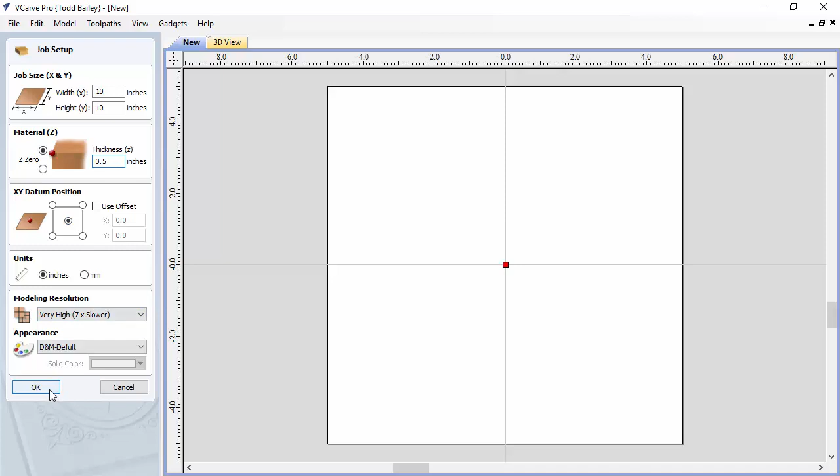We'll move over to our clip art tab and go to our Design and Make folder. I'm making the assumption you've already purchased, downloaded and installed the Wine Bar No.2 project, so you've got all 11 individual models available along with the assembled layout, which we won't be using here, but it's good to note that the assembled layout is an actual wine bottle coaster sized appropriately for a standard size wine bottle.

The recess in it is actually 4 inches across when you bring it into your software, as long as you don't modify the dimensions any. That's about the right size to accept a 3 to 3 1/4 inch wine bottle. There's a little extra wiggle room so that when you're putting your wine bottle down, you don't hit the ridge and end up having it topple over.

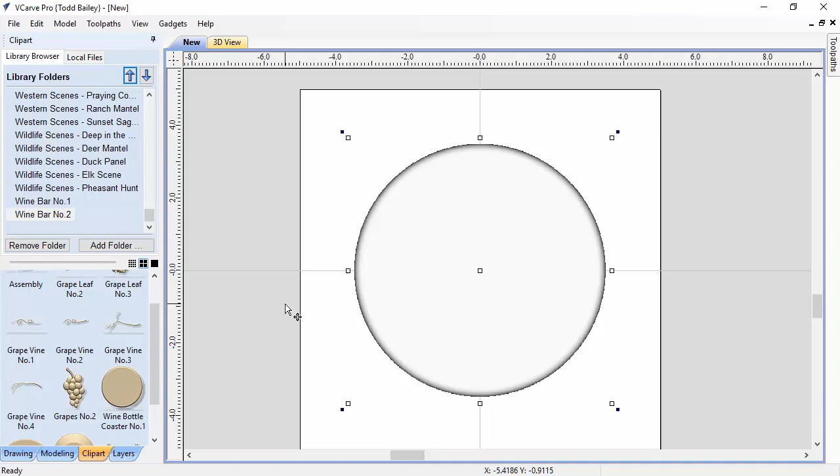So for this demonstration we're going to use wine bottle coaster #1. We'll double click on that, and that will bring the model into our job space. Now we'll flip over to our 3D view for a second and take a look at this. This is a very flat model.

If you chose to create this first layout, there are much more efficient ways of machining it than using a 3D toolpath. But we need to show you this to make sure you understand how to use this same model to create the recess for the wine bottle.

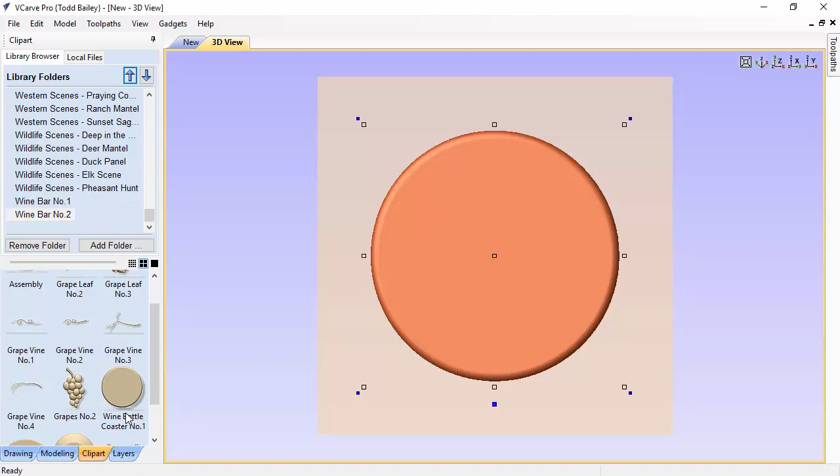Once we get through that, we can add to that or build upon those tools. So we're going to look straight down at it again and go to our modeling tab, making sure this is the proper size for what we need.

We'll click on the drawing tab and size this object up to the appropriate dimension we want. We're going to make this 7 inches across and hit apply. So now it's 7 inches round.

We had Link X and Y clicked on, and Auto Z Scale is on as well. Those are pretty much standard settings, but in case you happen to shut those off, make sure they're turned on so your width and height are the same.

Now we need to make sure the shape height is appropriate for the thickness we need in order to accept the recess we're going to put in there. So we'll go to our modeling tab and use the wrench here, the properties dialog, and make sure this is set to 0.35 of an inch. The shape height of that particular model is 0.35 of an inch.

That'll make sure it's thick enough so that when we put our recess in there, that's fine.

Now we accessed these component properties from the modeling tab, but in the future what we're going to use is this little button right here at the bottom. Once you have an object or component selected and you see the control handles show up, there'll be a blue button at the bottom you can click to bring up your floating properties dialog. It has a lot of the same options as your component properties, but they're condensed into this nice convenient little floaty deal that works really well.

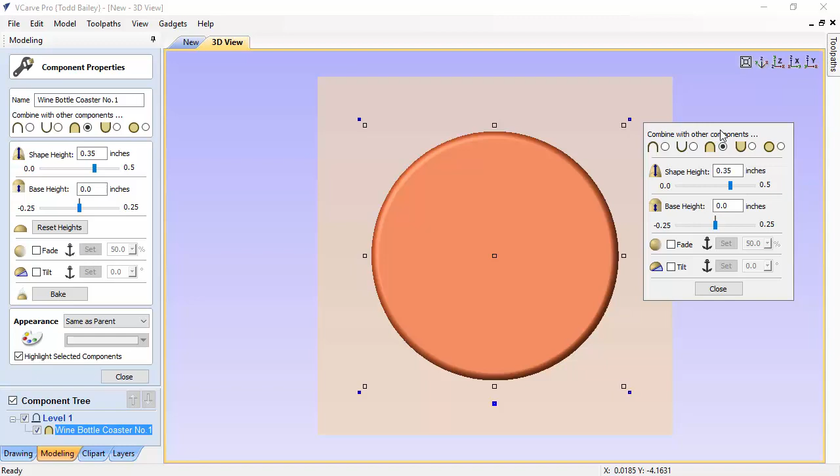So we're going to close that down, and we'll close this down. Now we're going to bring in our model to create the recess for the bottle, and again, like I mentioned before, we're going to reuse the wine bottle coaster again.

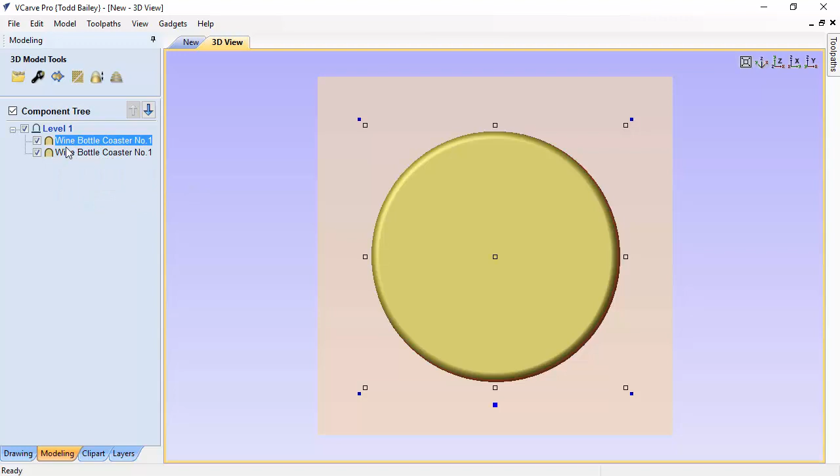Now when you bring it in, you can't see it because it's actually being merged inside the one we had there previously. So if we go to our modeling tab, you'll see there's actually 2 models in here, and the one that's selected is the second one we brought in. It always builds up from the bottom up.

So this is the first wine bottle coaster we brought in and sized, and this is the second one we brought in. So we're going to rename this just so we don't get confused in the future. We're going to right click on that, go down to rename, and we're going to call this recess. And there we are.

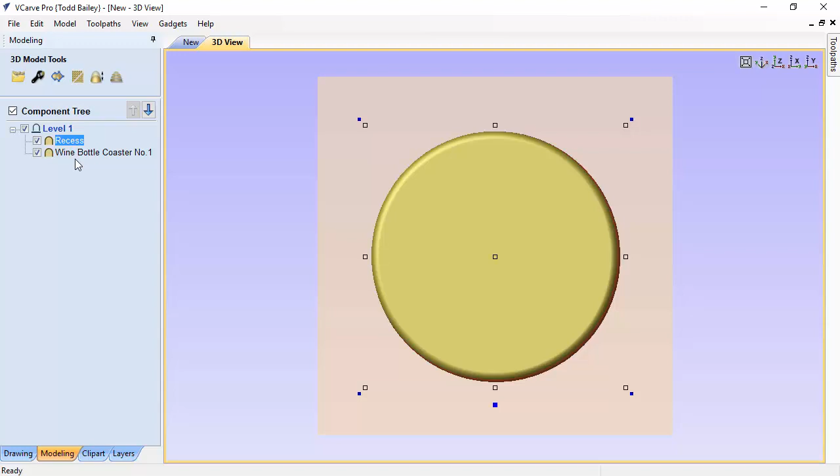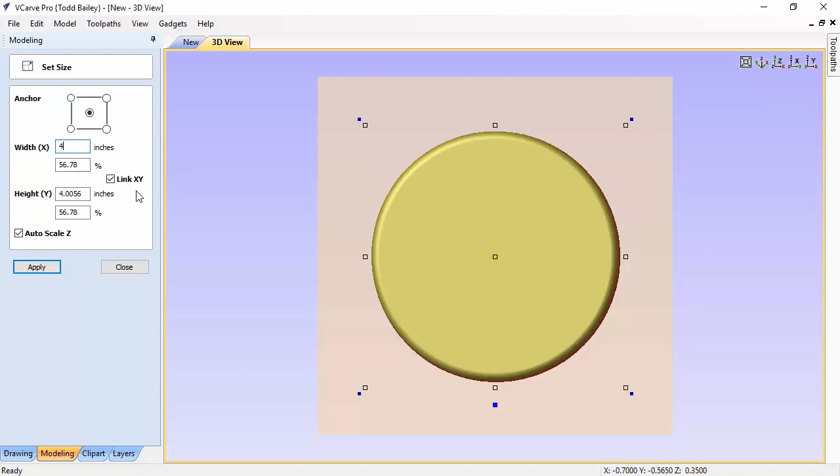So now we'll know there's an obvious difference between the two namings here in case we get confused. We're going to select that one, and instead of going to the drawing tab and clicking set selected object size, we're just going to press T on the keyboard. That brings up our set size dialog, and we're going to set this to be 4 inches, making sure we have link X and Y together and auto Z scale on, and we'll click apply, and that'll make our recess.

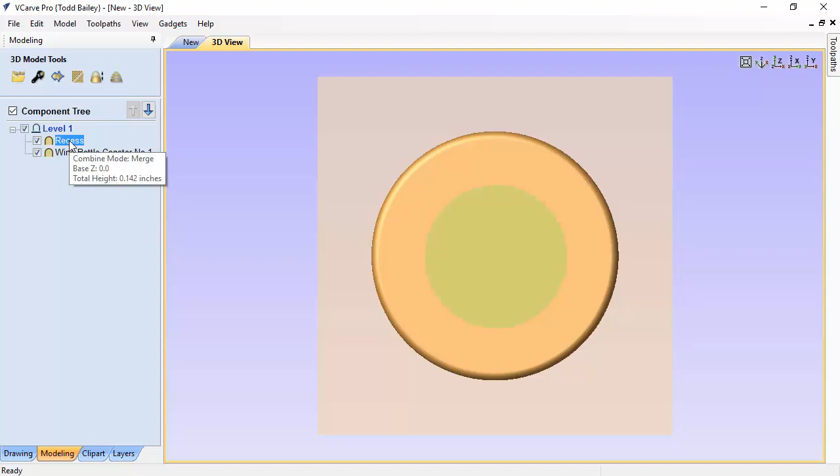Now you'll notice our recess is still being merged into our larger wine bottle coaster, and that's not going to work, because we want it to actually be subtracted away from our original model. So we're going to right click on this, combine mode, and subtract, and now we'll see we actually have a recess in our coaster.

That's not nearly deep enough for what we need, so let's go ahead and correct that. We're going to select that, click on the floating properties dialog, and make this 1/4 inch. That means our recess will be 1/4 inch deep, and the difference between the shape height of our large coaster and the recess is actually 0.1, which gives us a little bit of extra material at the base of this.

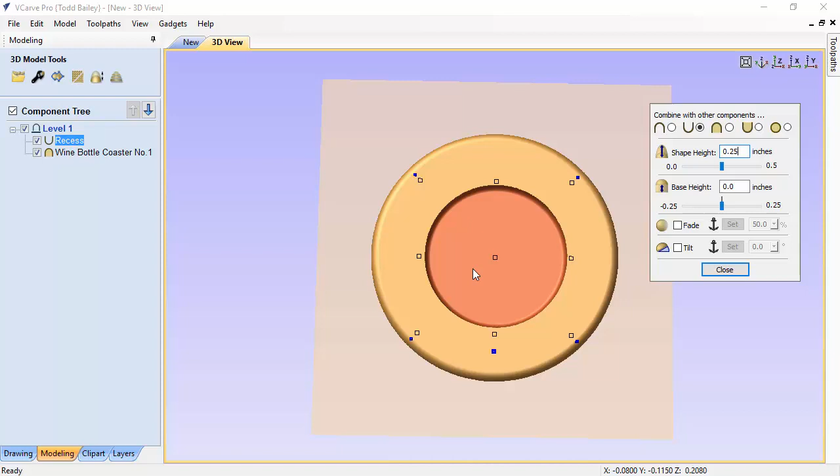Now that's good for right now, but in the future we're actually going to increase that by leaving a bit of material at the back of our project so we can thicken it up a little, because that's not quite enough, I don't think, to hold our bottle.

We're going to close that down now, and make sure this is centered in our job space. So we're going to press F9 just to make sure it's centered, and you'll see it was off center slightly, so we're going to center that up.

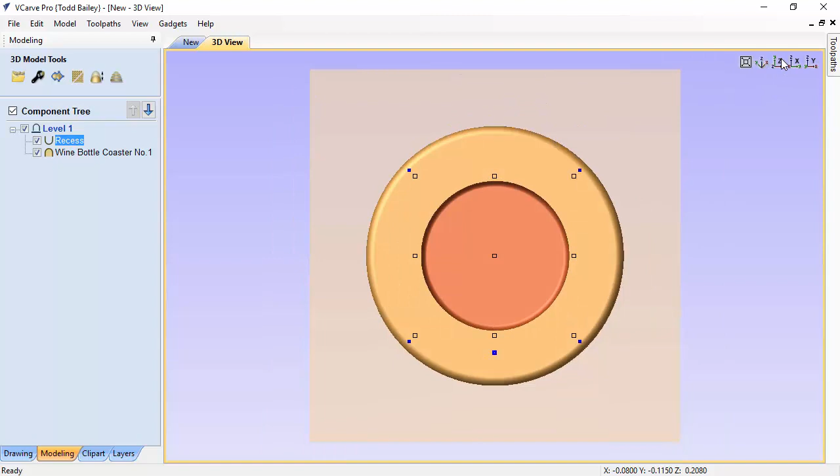Now we're going to look straight down on our project, and holding down our shift key, we're going to drag this up to here, because we want some space down here to add some V-carving, some flat area. So let's go back to our drawing tab, go to our 2D view, and press F on the keyboard to fit this to our screen, and we're going to create some text.

And we're going to create the text. Let's think this is maybe for a wedding, so we're going to put in Jennifer and Edward.

And we're going to make their wedding date September the 12th, 2016, and let's hope that that is a weekend, because I'm not quite sure - that's just a guess. We're going to make sure that's centered, use the Pristina font, and click apply. We're going to close that down, and now move that down to the bottom here. Perfect.

So that looks pretty nice. Now that's our very basic layout, and why I went through that was just to show you that we needed to use that wine bottle coaster model twice in order to give you the recess.

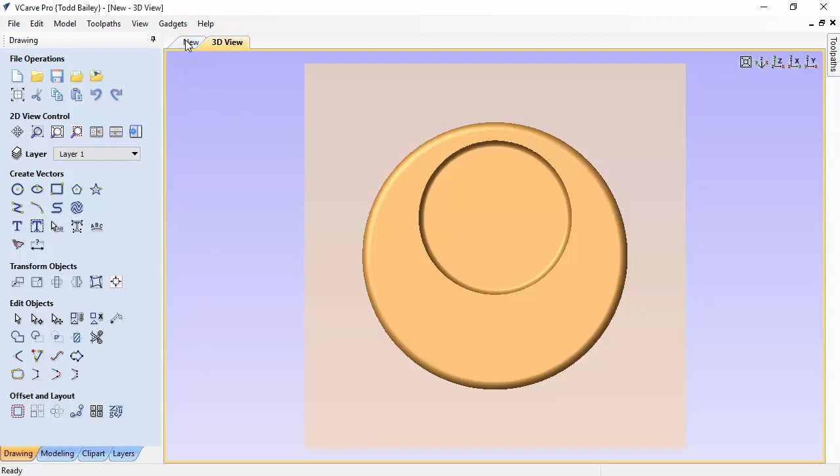From here on out, we'll be using that wine bottle coaster to create the recess for all of the projects. And if you decide in the future to create a candle holder out of this project, much like we show on the website here - if you scroll down, you'll see there's a candle holder here. The center socket is actually the coaster, just subtracted, and the shape height is exaggerated so that you can actually create a socket. We have all the instructions on the website here to create the proper size socket for a candle, depending on whether you're making a pillar candle holder or a tapered candle holder. So all of it's there for you in case you want to do that.

So let's go back to VCarve. Now let's update this with a little bit more, make it a little more interesting, because like I said, right now this is very basic. To machine this with 3D toolpaths probably wouldn't be very efficient.

You can do it much quicker by just using a round over bit, do a quick little profile cut, pocket out a hole that's the right diameter, do a little V-carving, and then you would be done. So this really isn't a very efficient way of doing this. But if we add some grapes and some grape leaves to this, then of course you can't use that super fast machining, so you're going to have to do something a little different.

So what we're going to do now is go ahead and adjust our text, and make sure our text goes inside of the recess. That'll be kind of neat, because when the coaster isn't in use, it's a nice little keepsake for their wedding date. So let's just edit that text.

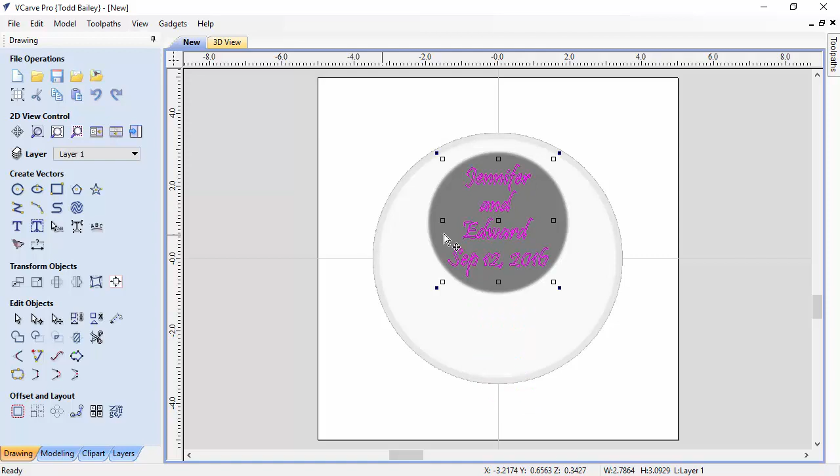Now there's a lot of space in between these lines of text, so let's just go ahead and tighten that up a little bit. We're going to use edit text spacing and curve. If we hover in between the lines of text, you'll see that my pointer turns to a line indicator, so we can adjust the spacing between that.

If I click it without holding down the shift key, it subtracts space. If I hold down the shift key and do it, it adds space. So we're going to let go of the shift key, and just snuggle those in there a bit better.

Be careful, because sometimes when it sneaks in, you end up hovering over top of your letters, and if you click on an actual word, you lose some space between your letters, and that might not be so great. So maybe zooming in might be a good option for you. We're going to take out some more space there, and here, and a little more here. Oops, I did what I said not to do.

Then we're going to go back to our pick tool. I'm going to select that, and we're going to nudge it in. We're just going to eyeball that into the center, and I think that looks pretty nice the way it is.

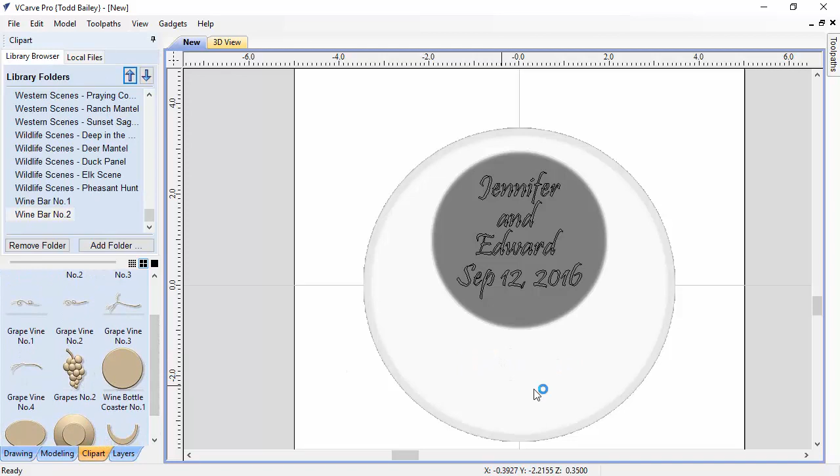So now, to accommodate some more models, we have a couple different options. One is we could easily just go to our clip art tab and add some grapes onto the surface of this if we wanted to. Just go ahead and size that down, and we're going to put that here maybe.

We turn it slightly and pop that in like that. And there we could just basically add some grapes. You're going to have to change the combine mode, so go to modeling, right click on that, combine mode, and add.

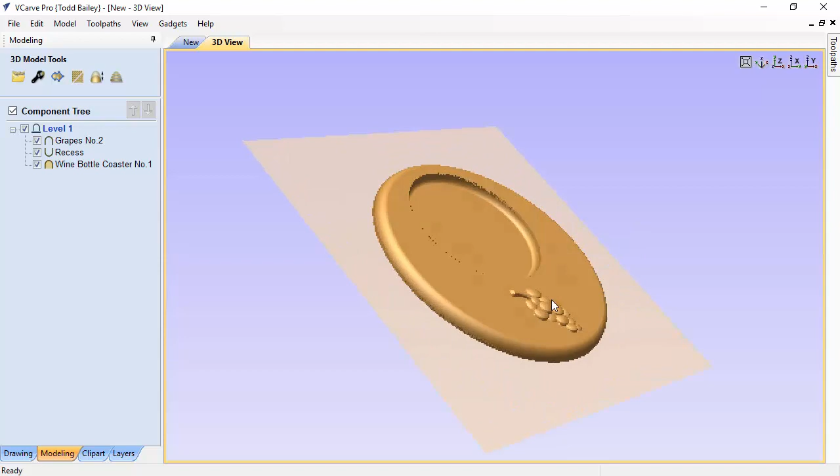Now we've added some grapes to the surface of our wine bottle coaster. We could build on that, but that's not going to give us the best use of our material thickness. We included this little guy, called wine coaster recess number 1. When it's subtracted away from a surface, it will create a recess that you can bring models into and tuck in, giving you more shape height and definition from your projects. It'll also make it look like the leaves are actually coming out of the coaster onto the surface, which is a neat effect.

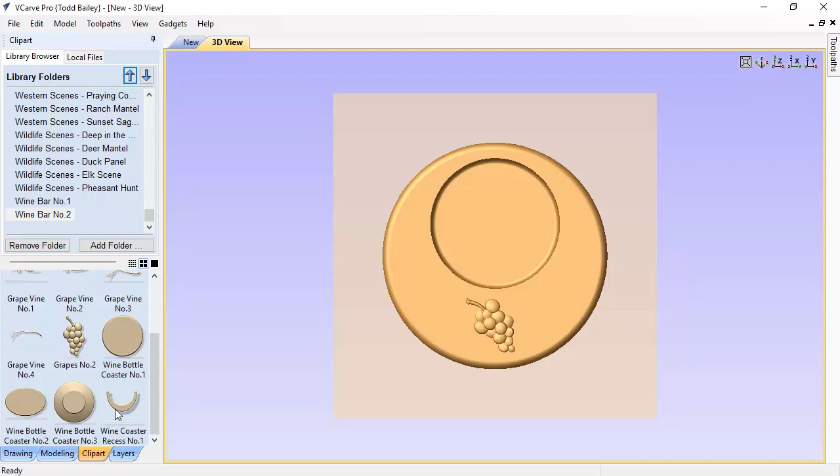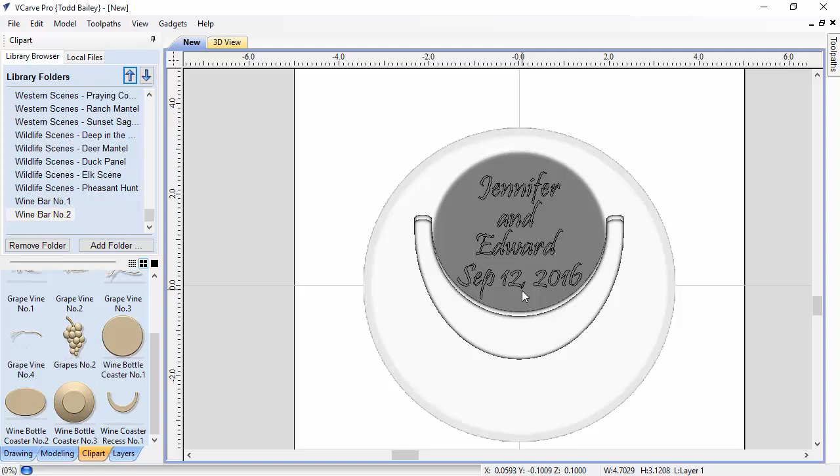So we're going to delete out the grapes by selecting it and pressing delete on the keyboard. Let's bring in our wine coaster recess. That's going to be way bigger than what we need, so let's go to our 2D view so we can see a little bit better. Now the way we're going to do this is we're going to size this down so it fits nicely.

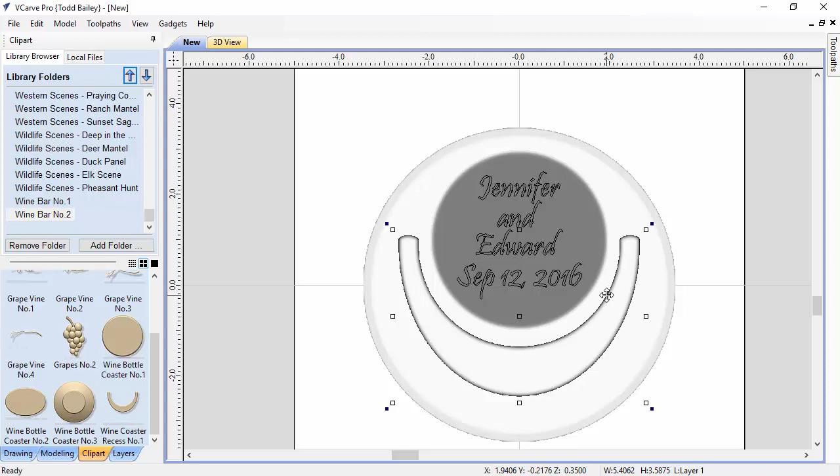It cradles that wine bottle coaster nicely in there with a little bit of space. Using your cursor keys and the sizing handles, we can work away at making sure it cups just nicely, and that's what it does. So now we can size that up to be the size we want, and then move it down a little bit so this distance is pretty even all the way around, and that looks pretty nice right there. Then we'll flip to our 3D view.

Again, we need to change the combine mode of this. We're going to go to our modeling tab, right click on that, change our combine mode to be subtract. And now we have a nice little recess there that we can go ahead and fit some models into.

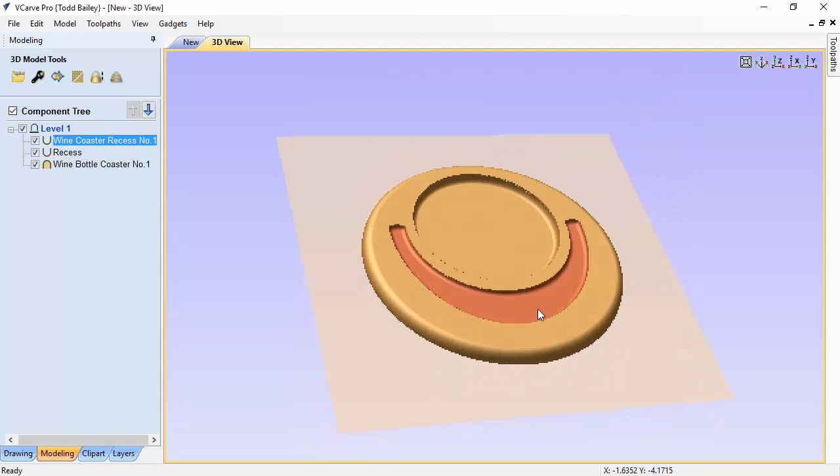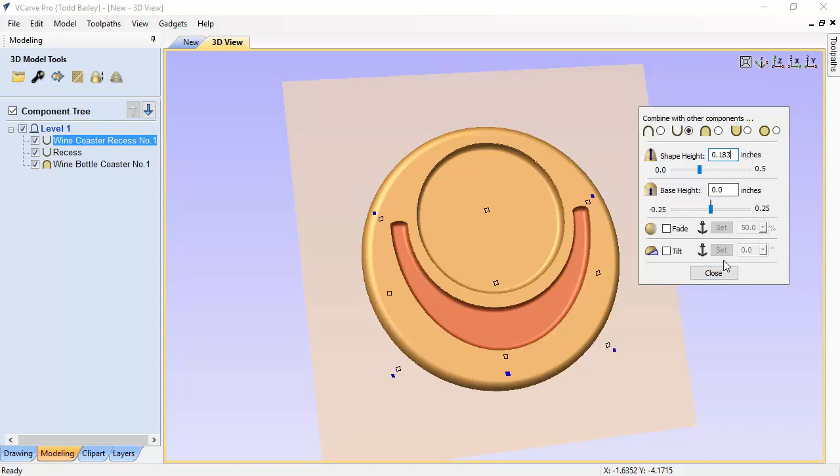Now I don't think that's quite deep enough for what we want, so let's bring up our floating properties dialog again. We're going to change this recess to be about 0.183. Now that number just comes out of me messing around, working organically with these models so things work well visually for what I want. So we're going to go with that for now. We might come back and change it if it doesn't work for us, but I think that's pretty good.

Let's look straight down. Now we're going to do a little bit of work with our layers over here. This is mainly so we can keep our layout a little more organized, but also so we can make use of one of the new features of version 8.5 of VCarve Pro.

So we're going to rename this level. We're going to call this coaster and the recess. And then we're going to right click again and insert a new layer, which we're going to rename, once we select it, details.

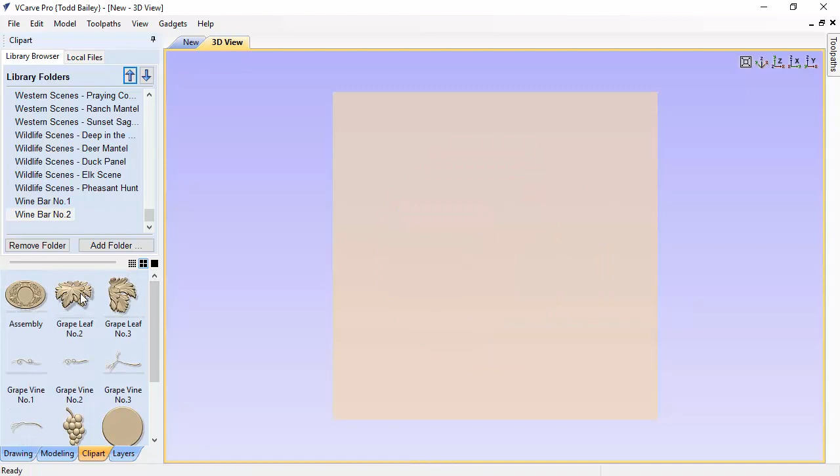And then what we're going to do is add all of the details, all of the grapes and leaves, onto this layer. So let's bring in our first leaf that we're going to use, the grape leaf number 2, and we're going to position it right down here at the bottom of that recess. So we're going to grab our shift key and drag it down.

Holding down the shift key while we drag means it's going to stay nice and straight up and down. It's going to follow along and constrain that. And we're going to size it down.

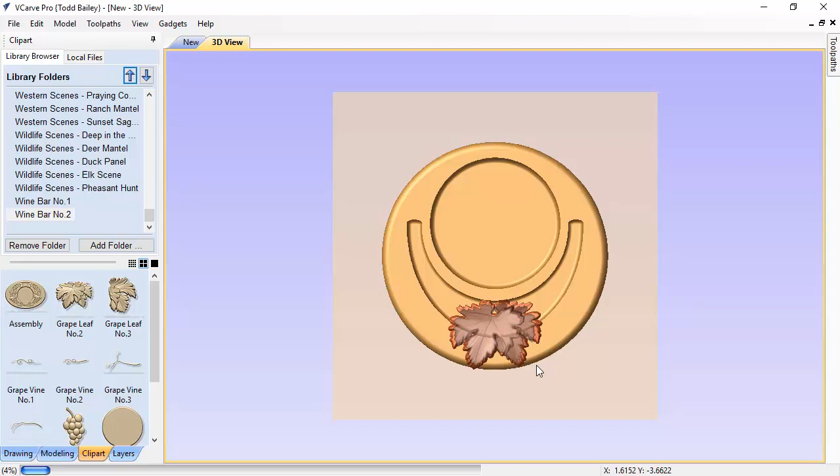I'm going to work with these very organically. All I'm looking at right now is the size of it, not how it works with other models yet—we'll mess around with that other stuff in a bit. Perfect, that seems about right. Maybe a little bit smaller. Let's just use our cursor keys to nudge it up.

Let's zoom in a little bit and flip over to our modeling tab. Now what we want to do is look at the way our layers are working together.

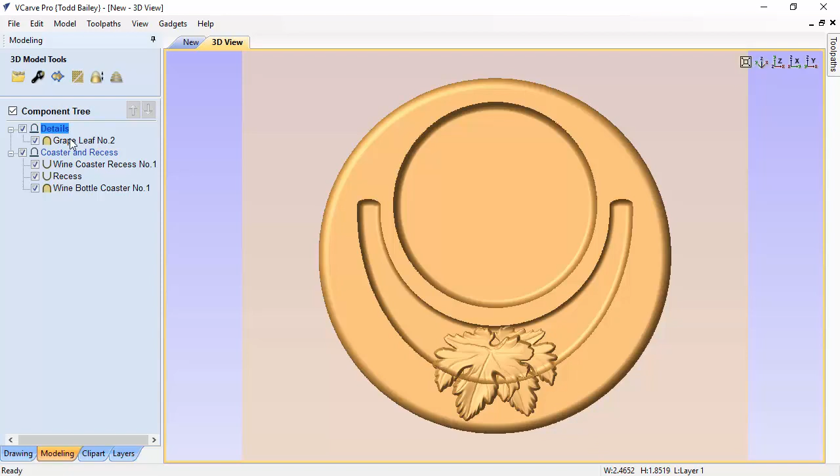First of all, the details level is being added to the coaster and recess level, and that's why our leaf is wrapping over top of that and looks kind of funny. What we actually want to do is right click on this level and use the combine mode of merge. Now our leaf goes away—that's because it's tucked down. If I select it, it's tucked inside of our coaster, which means you can't see it.

So if we think ahead about how this is going to be laid out, anything I decide to put inside of this recess needs to have a base height equal to the depth of the bottom of this trough. If I run my mouse over top of this, down in the bottom right corner, you'll see a Z height—0.167 is the height of this flat area.

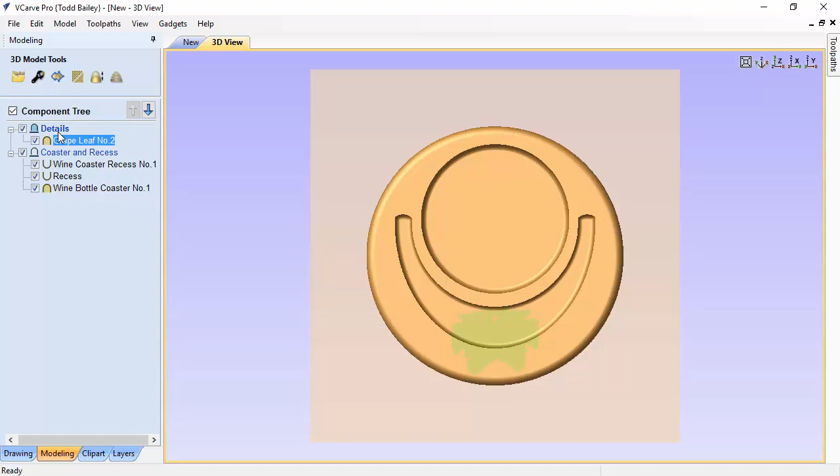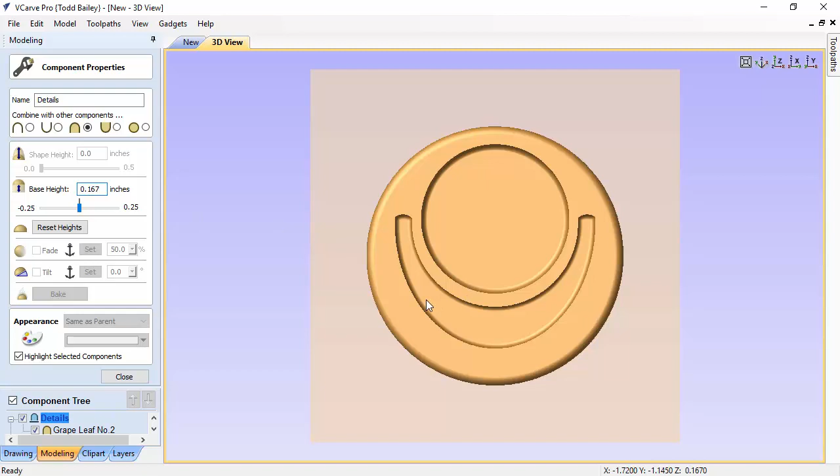So if I use this new feature available in version 8.5 of VCarve Desktop, VCarve Pro, and Aspire, I can go up here to the properties of this particular level and give anything on this level a base height. We're going to change this to 0.167, which equals the base of this, and click close—you'll see it pops right into place because it's automatically saying this level is now 0.167 tall, and anything on there follows.

If I select this grapes and look at my floating properties, it's not reflected here in the base height. It's actually set up inside of here, and if I hover over top of that, you'll see the base Z is set to 0.167. So that's just a good little tip, and it's going to be handy for the rest of this layout.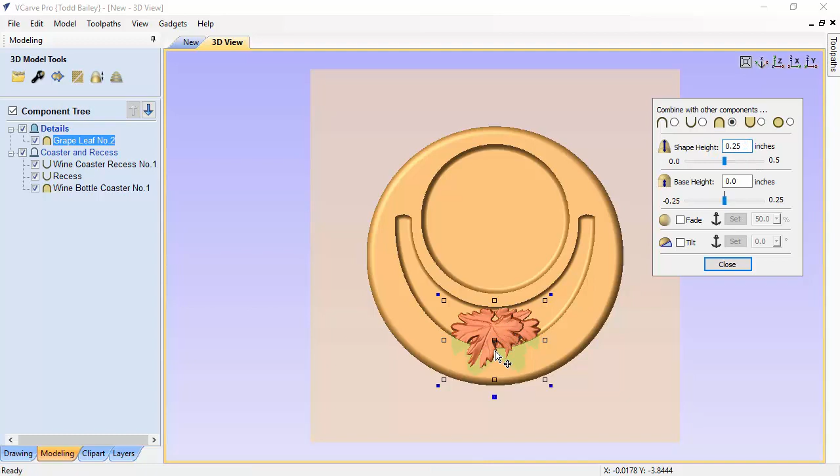Now let's go ahead and get this leaf to fit in here properly. We're going to change the shape height of this to be 1/4 inch—again, I'm just guessing at this. It doesn't quite fit in there, but I like the way it fills in the space.

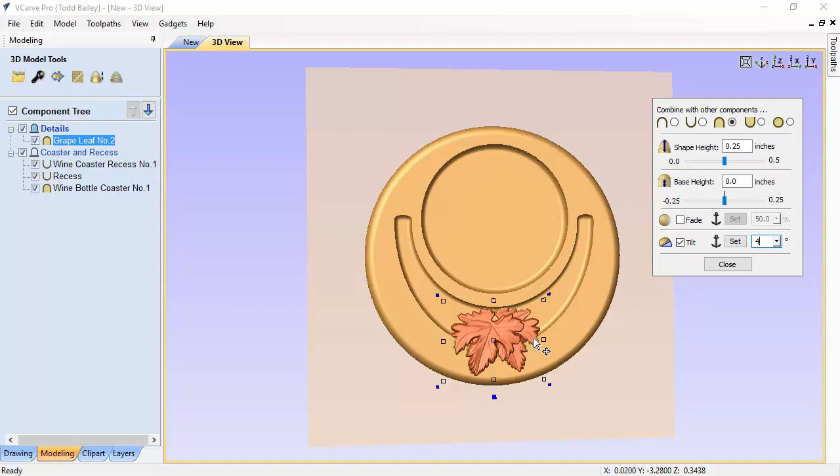So let's go ahead and tilt that, tilting from here to there. We're going to tilt that about, I don't know, 3 degrees maybe we'll try. That's pretty close—let's make it 4 degrees. That's not bad.

And then I do see a little bit of a problem. I want to tuck some things underneath that grape leaf, so I want to make sure I have a little extra base height on this so I can tuck things under there. Let's just go ahead and add a bit of base height to it—I'm just going to go with 0.1. Let's see what we get with that. That looks pretty good.

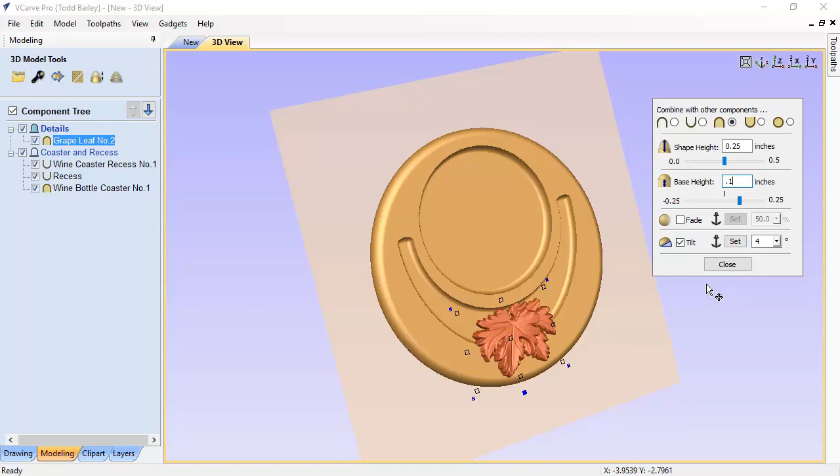Yeah, I'm pretty happy with that. Maybe now that we've done that, we can change this tilt a little and bring it down a little bit. That looks pretty good. Great, so let's add a little bit more to that.

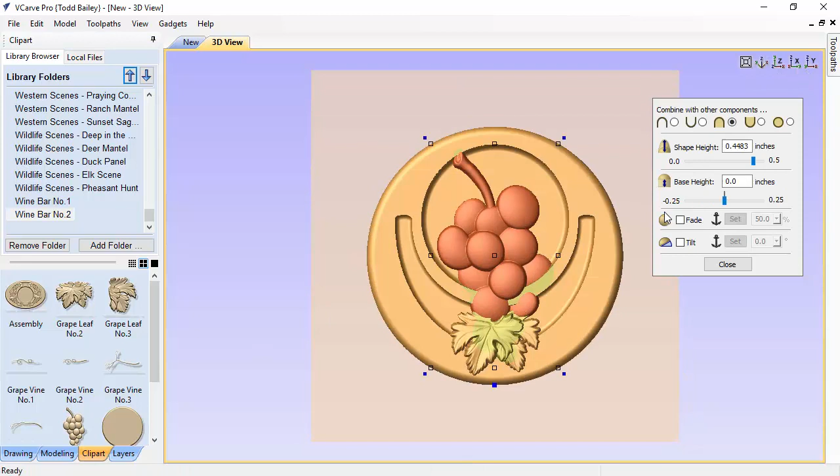Let's go to our clip art tab and bring in our grapes. We're going to look straight down on that. And again, seeing as we've added that base height to this level, it actually appears like it's in there where it belongs now, which is really quite nice. So I can go ahead now and rotate that around.

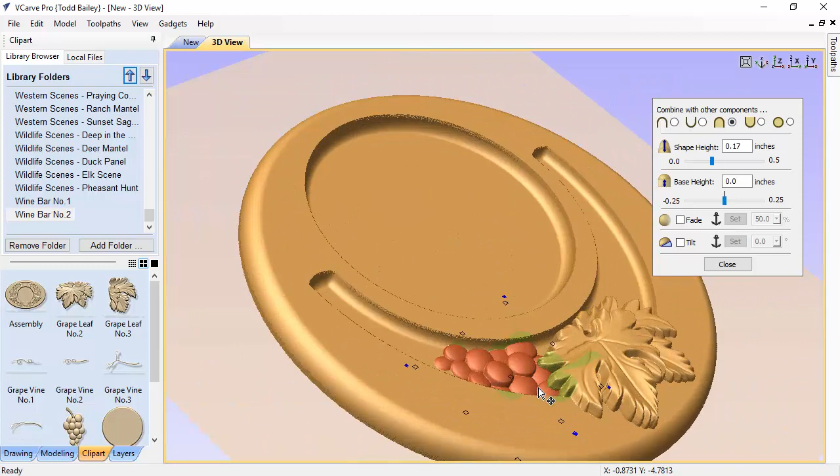Kind of fit that in there where I think it belongs. What I'm looking at is just the way these play with each other and make sure they play nice, and that looks pretty good. I might just change the shape height a bit to be 0.19, just to see what we get.

Yeah, pretty happy with that. That looks great. So now what we want to do is we want this coaster to be symmetrical, for ease of use and also time saving, but I think it's going to look quite nice being symmetrical. So we want to copy these grapes across the center line horizontally in our layout.

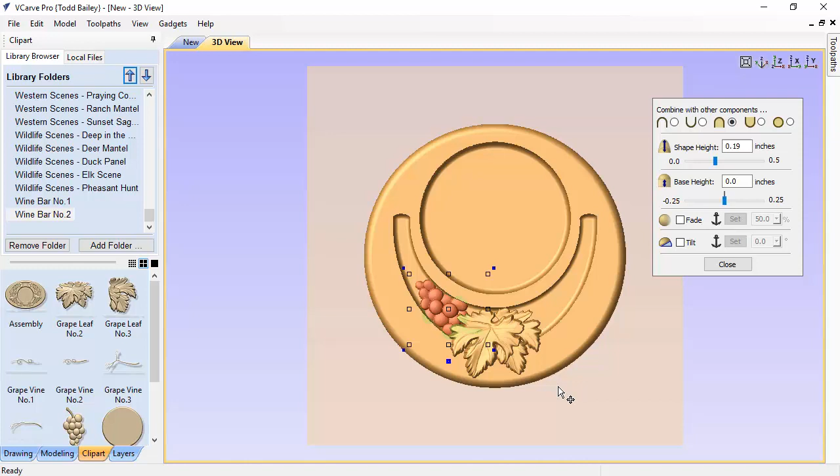To do that, we're going to hold down our Control key, which says make a copy. We're going to hold down our Shift key, which says across the center line, and while we have those two held down, we're going to press the H key, which tells VCarve Pro to flip it horizontally. So we're flipping it horizontally across the center line of our project, and there it is. So that's Control, Shift, and H, just to help you out again.

That looks really nice. Let's go ahead and bring in our second grape leaf now, and we're going to go ahead and size that down. Now the nice thing about this grape leaf is it's got that nice curl on it.

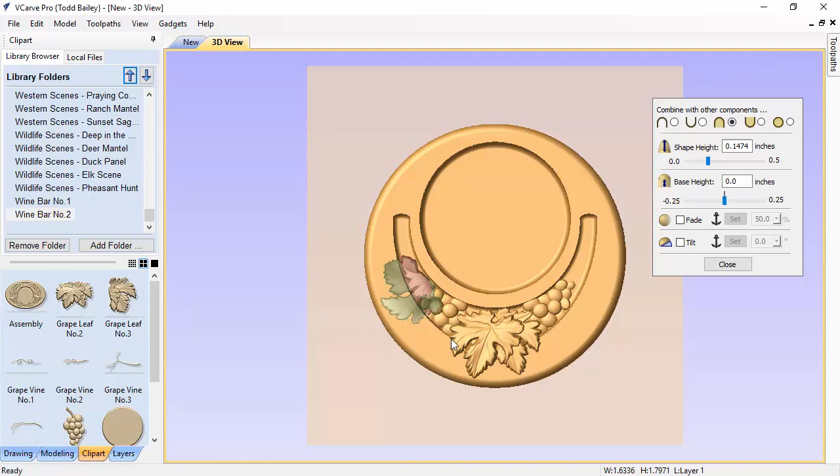So we can actually use that to our advantage by making it look like it's kind of bending up because it's trying to fit its way through our recess here. And we want to leave enough space between this edge and the edge of our leaf so that our cutter is going to get in there a little bit, just enough to make a little bit of a recessed shape in there.

That looks great. Now we're going to need to do a couple things. I think we need to add a little extra base height to it so we can get above some of that. So let's just go ahead and add in a base height of 0.1. See what we get. That looks pretty nice.

And then we're going to tilt it like we did the other one. So we're going to click tilt. We're going to add in our two anchor points, one here and one out there, so it's going to tilt between those two points. And we're going to tilt that, let's say 3 degrees again.

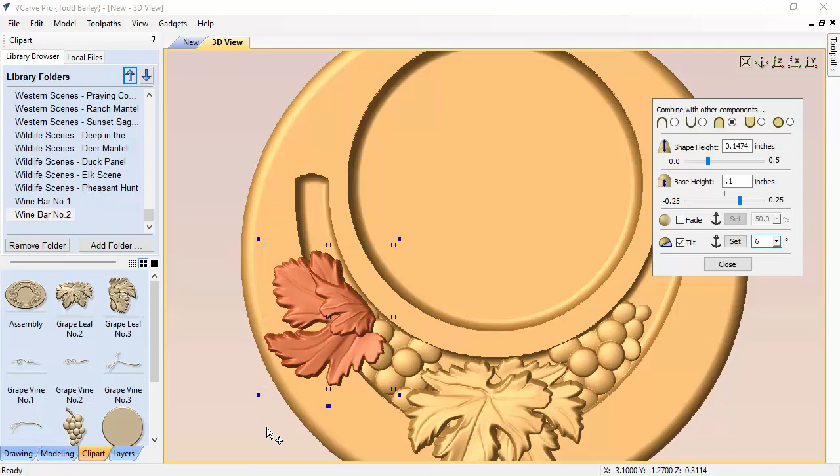See what we get. Now it needs to be more than that, so let's make it 4 degrees. No, still not enough. Let's make it 6 degrees. And let's just take a look, roll it up on its edge. Are we happy with that? I think it looks pretty neat. So let's look back down straight onto that again.

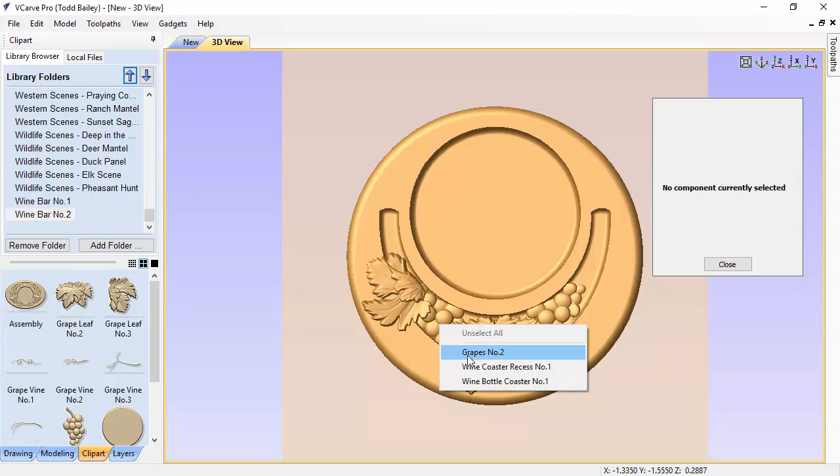And we're going to go ahead and now take and copy this grape leaf. Now you'll see I'm having trouble getting hold of that grape leaf. If you double click on it, it'll select. Now let's just say you're having trouble because things are layered up too much, and you can't click on the model or component that you want. Then if you hover over it without anything selected and right click with your mouse, it will bring up a list of components that are underneath where you right clicked.

So I can go ahead and just select grapes out of that, click it again, grab it. While I'm moving it, hold down the Control key because I want it to copy, and then let go approximately where I want it to be. And now I can go ahead and size that, rotate that around, and fit that in where I need it to be.

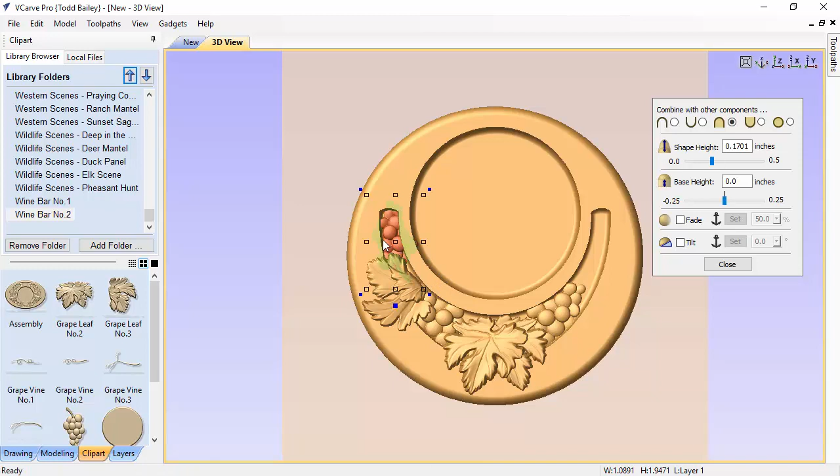And that looks pretty slick right there, I think. I'm just getting it to kind of finish up. Didn't want that blank space there. I could have used any models, I could have used some of these grapevine models if I wanted to, but I thought maybe having the grapes in there would be rather nice.

And again, let's just go ahead and make this 0.18 for shape height. Looks really nice, and I'm happy with that.

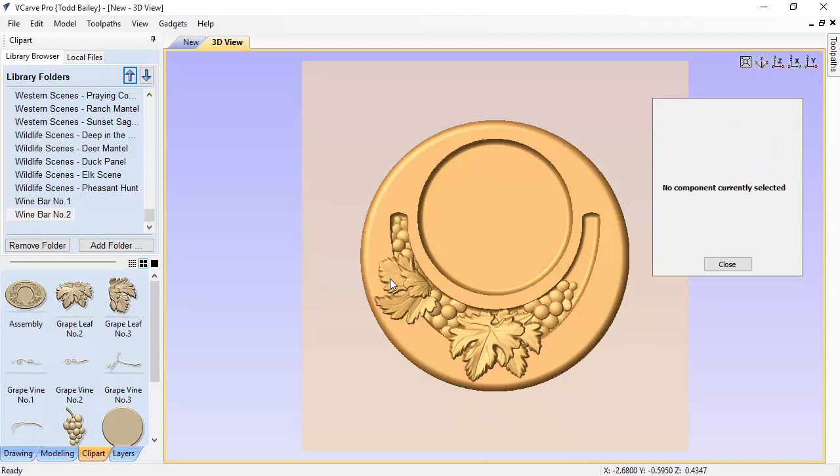So now what we want to do, again making this symmetrical, we may as well go ahead and copy these two across our project. I'm going to deselect everything, right click, and click grape leaves, hold down my Shift key, and hopefully get the grapes. Nope, so I can't quite get it that well.

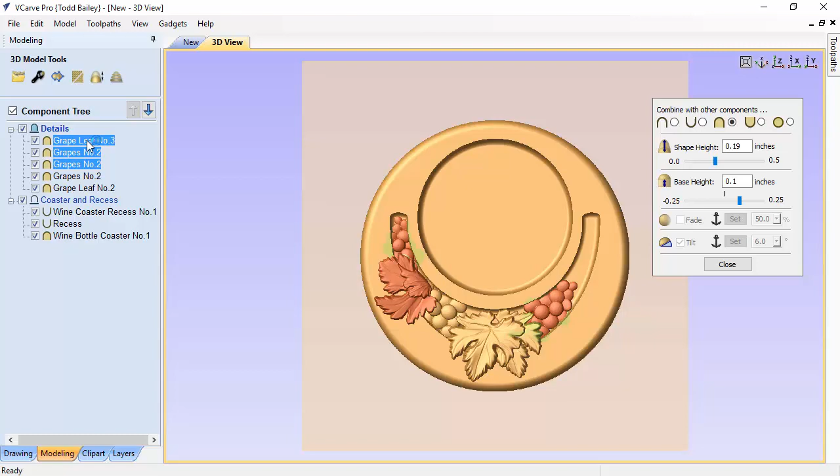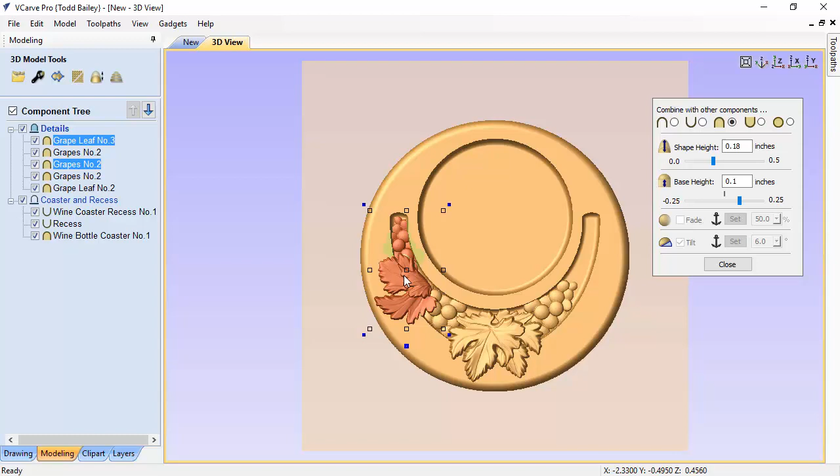So I'm going to go over to my modeling tab, and I can do all that from here too. I'll select my grape leaves number 3, hold down my Shift key, and find the grape leaves right there. Hold down the Control key, not the Shift key. If I hold down Shift, it selects all the models between the two I've selected, but I actually want to Control-Shift it. Control lets me select individual items in any order I want. Click them again, Control Shift and H, and it should copy them across to our project like it did. Beautiful. Looks great. That's wonderful.

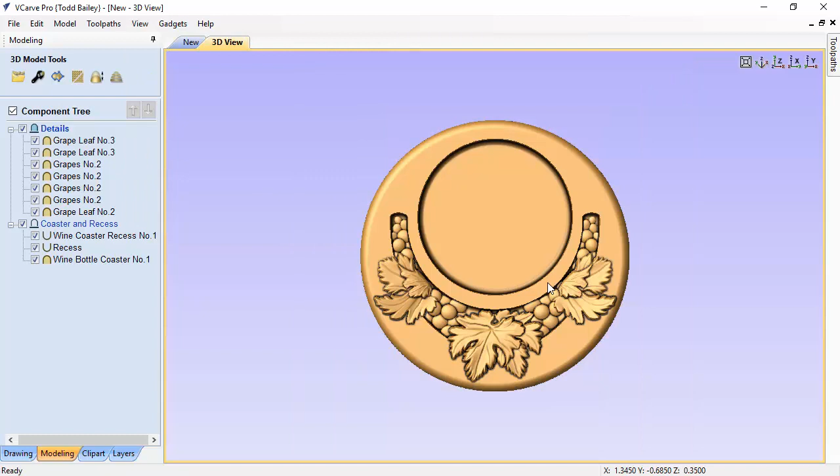Now if we wanted to present this to our customer to see what it looks like, or email them a nice picture, we go up to View. We could use the new shadow shading, then turn off our modeling plane, then go to View and save out your image, save shaded image, and email that off to a customer for their approval. But seeing as we can't even see our VCarving in there right now with this particular layout, you could just tell them the VCarving will be there, or you could send them a preview of your tooling, which would probably be a little bit better.

And that's what we're going to do next. We're going to show you how to do some basic tooling on this. Now you need to keep in mind the feeds and speeds of your machine, the material thickness, and the cutters you're using. What I'm going to show you is just very basic, and you shouldn't use these as being the law for your machine, okay?

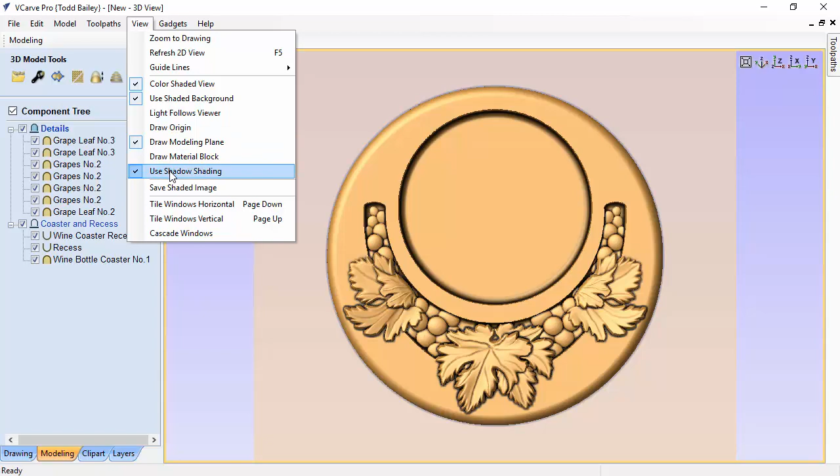So let's go ahead now, and we're going to put back on our modeling plane, and turn off our shadow shading. Not that we have to, but we're just going to do that. Now we're going to hit Page Up on our keyboard, and that's going to make sure we see both our 2D view and our 3D view. And we're going to go to our drawing tab, and we are going to switch to our tool paths.

So the way we're going to machine this is we're going to do a roughing pass, a finishing pass, a VCarve pass, and a profile cut to cut this out. So it'll be 4 individual tool paths. We're going to be using the same tool to do our roughing as we do our profile cut, so really you're only going to need 3 different tools for this particular project. So let's go ahead and start off by doing our roughing.

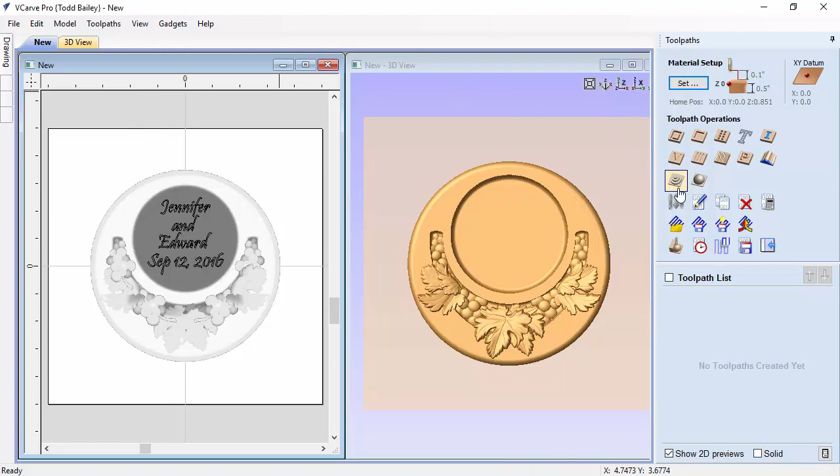So seeing as we haven't set up our material, it's going to want us to do that. And right off the bat you're going to see a big red error here. When we first set up our project, or our job excuse me, we had told it to use a 1/2 inch piece of material. Well, if you look here, our model thickness is actually 0.61. So we need to either set our model to be a little bit thinner, which we can do right here by hitting this button.

We could change it to fit inside of our material, or what we can do is choose to use a little thicker piece of material. In this case, I'm going to choose to use a little bit thicker piece of material. We're going to use a 3/4 inch piece of material instead. You'll see that the error's gone away, and that leaves me with a little bit of extra material that I can choose where to put it, either at the top or the bottom of my layout.

If I was sure I was using an uneven piece of material, or even if there was any worry of that, I might want to put my gap at the bottom and change this to 0.13. That will leave a little extra material at the top so I'm machining that away, making sure I don't miss any details on top. So maybe we'll go ahead with that as a precaution.

Then for the rapid Z's, of course you set that for your machine. They look pretty good for now.

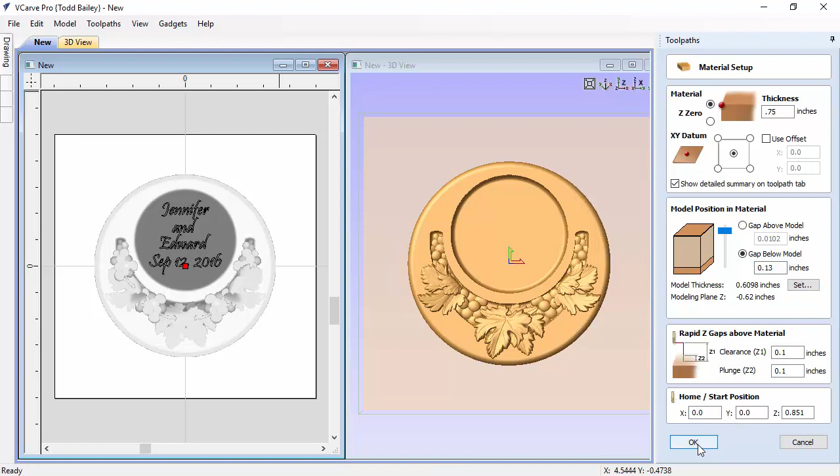We're going to click OK and start our roughing pass. We're going to use a 1/4 inch end mill, and use our model boundary, letting VCarve Pro decide where the boundary is. We'll make sure our boundary offset is a 1/4 inch, change our allowance to 0.04, and calculate that.

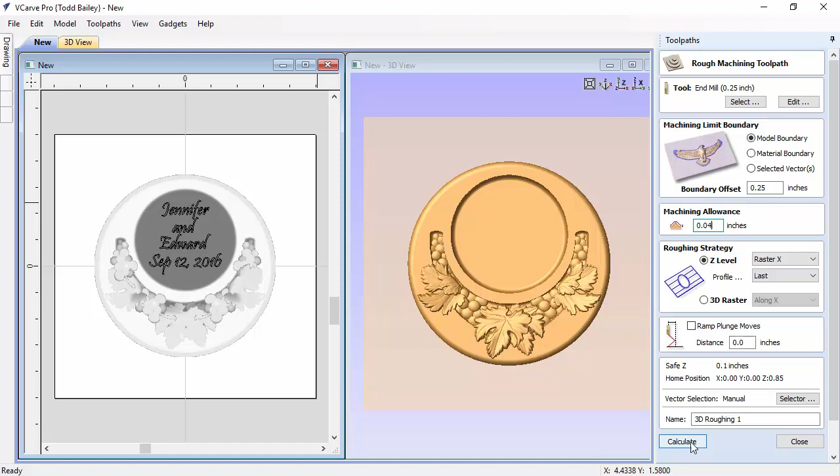Then we're going to preview our visible toolpaths. We always suggest previewing your visible toolpaths as you go, and if things aren't working like you expect, go in and make some edits. This is exactly what I thought was going to happen. It looks really good, so that's great. Let's just close that down.

Let's go ahead and do our finishing pass. We're going to use a 1/8 inch ball nose end mill, which is great. We'll use the model boundary again, offset the same amount as our roughing pass, and use a raster toolpath, then calculate that.

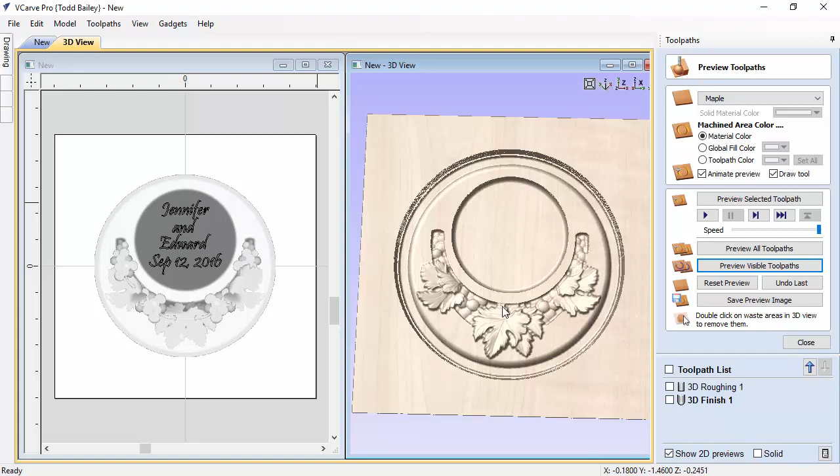Let's preview that. That looks exactly what I expected. Remember, I left that little gap in here, so my tool is getting in there nicely. I could have left a bit more of a gap, but maybe when you're laying out yours you'll do that. This is what's so great about these previews - you can go in and think, I might want to make that little change right there.

Let's close that down. Let's go ahead and do our VCarving. We're going to select the text we want to VCarve, go to our VCarving settings, and leave this the way it is - start depth is 0, no flat bottom, and then none. We're going to use a 60-degree V-bit, which is going to be quite nice.

We're going to make sure we project the toolpath onto our 3D model. In this case there are no contours where it would lay that V-carving on, but if there were, this would make it follow those contours. Also, I'm not quite sure what the start depth is right there, so I'm not going to mess around with that.

So we're just going to project that on, and we'll calculate it. Let's preview the visible toolpath. It looks quite nice. Let's close that down.

Now the last toolpath is our profile cut. To create a profile cut, we need a vector that goes all around the outside of the border, the outside border of our layout. In this case it's just a circle, so that's pretty easy. But if some of these leaves happen to protrude past the border, we'd have to go create a vector. I'm going to show you how to create a vector easily for just this round circle.

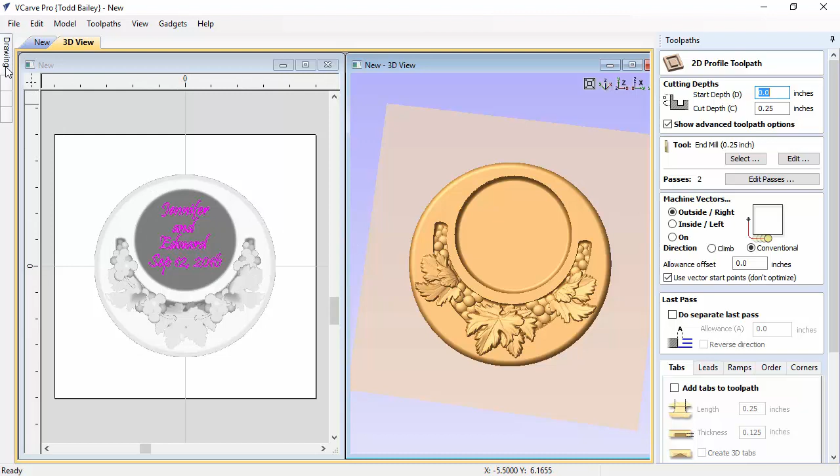So we're going to bring up our drawing tab again and pin that down. We're going to go to our modeling tab and select any models that make up the border - in this case there's only one, the wine bottle coaster number 1.

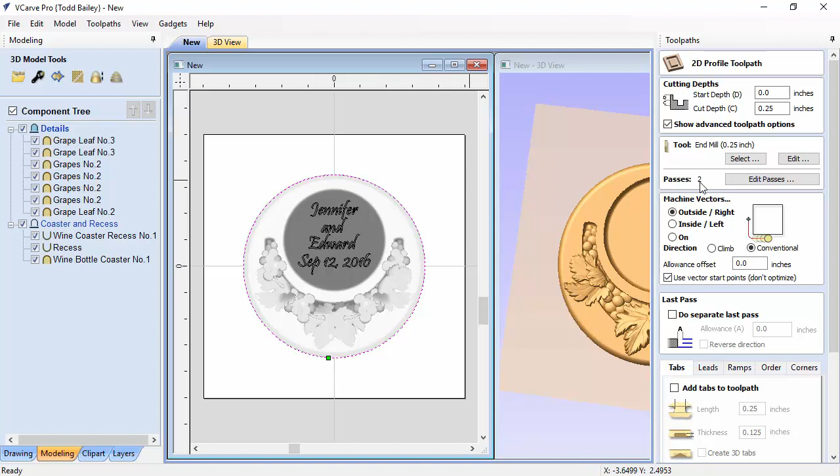We're going to go ahead and create an outline. You probably didn't see it do much, but it added an outline to the outside of this, that purple line, and we'll use that for our profile cut. Let's unpin our modeling tab and use the 1/4 inch end mill. Oh sorry, we need to go set up our cutting depth.

So in this case, we know that we've gone down at least 0.6 into our material, because that was the thickness of our model. And then we want it to go down the full depth of our material, which is another 0.15. These two numbers added together should equal the thickness of your material. If they don't, you're going to end up having some material left at the bottom of your profile cut, and if it's too much, it'll give you an error saying the numbers don't match up, so make sure they add up to the thickness of your material.

We're going to use a 1/4 inch end mill, and outside the line. You'll see it's going to do 2 passes around this, which is great. Just as an aside, if we decided to make this first one at 0 and this one at 0.75, it's going to take 6 passes to do that, and that's kind of silly because we've already removed some material around the outside. So we're not going to do that. We're going to make this 0.6, 0.15. It'll save you some time, and we're only going to do 2 passes.

We're going to go ahead and add some tabs. These tab thicknesses are pretty good: length 1/4 inch, thickness 0.125. That's going to be nice, and it will allow us to have enough material behind that it will stay in place.

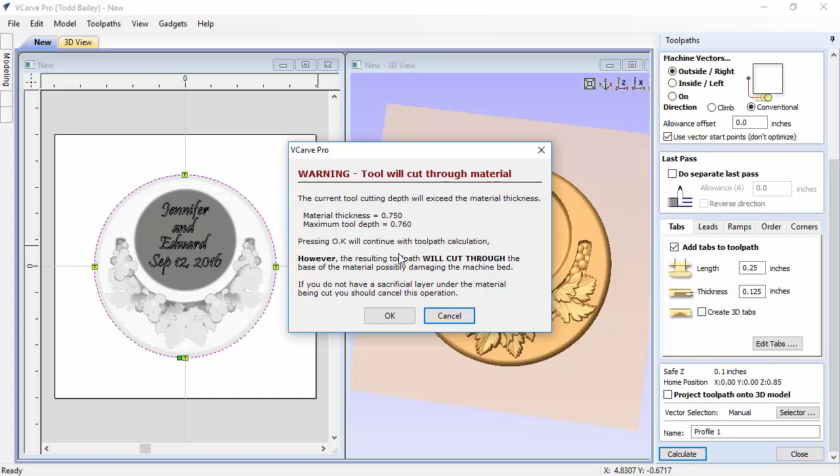I'm going to click close, scroll down, and say calculate. Oh, I've got a problem—it says material thickness is 0.75, maximum tool depth is 0.76, so we're going to change that. I put the wrong number in there; it should be 0.15. It was good that it showed me that. Let's recalculate. Now it's happy.

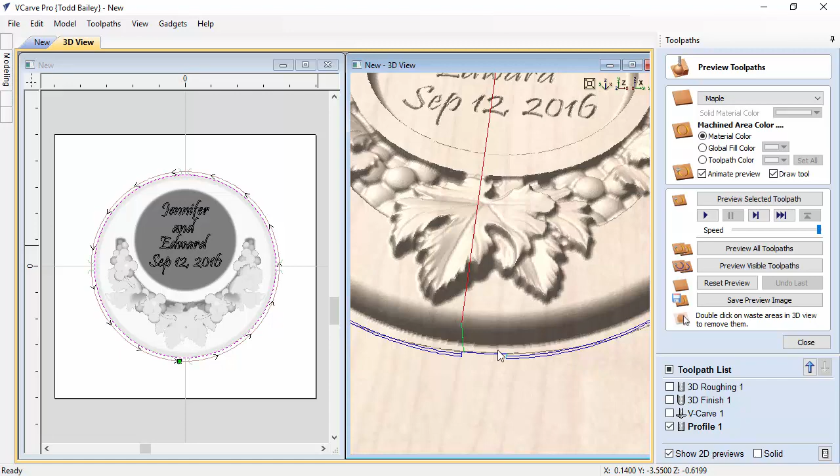If I zoom in on the tooling here, you'll see it's actually putting the tab in where it belongs. Let's preview that visible tool path, and it cuts through, leaving those tabs there. So now you can go ahead and cut that out of your piece of wood.

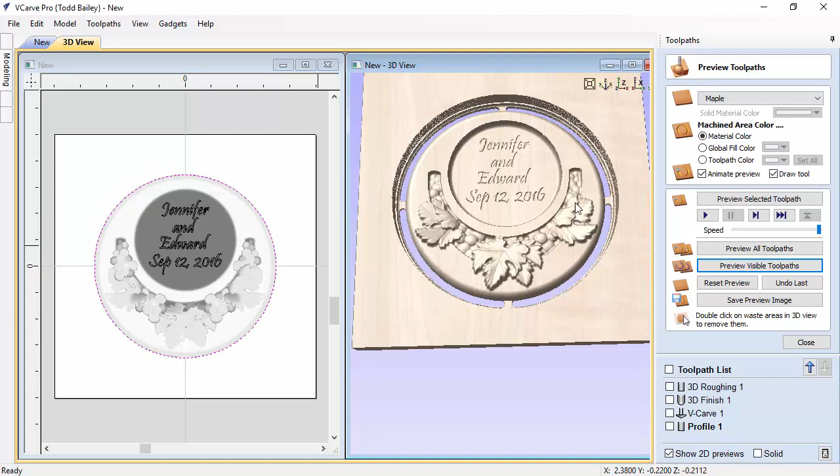A couple things I'd like to point out. One, like I said before, I probably would have gone in after looking at my preview of my tool paths and maybe nudged this leaf out a little bit farther, and this leaf out a bit farther, so my tool might have gotten in there a bit better—that would be nice. Also, looking at this, knowing I had a little bit more material, I actually could have made this recess a little bit deeper, which might have made it more stable as a wine bottle coaster, and also may have given it a nicer balance. But overall, I'm pretty happy with that, and I think it would be a nice little wedding gift.